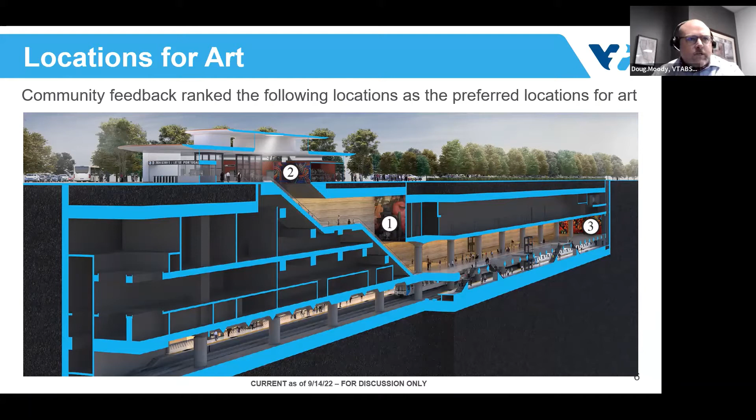This slide includes a summary of things we heard at the last CWG meeting and during the community social about what should be represented in art at the station. We heard there's a multicultural community, and there's multiple heritage that should be considered, including Portuguese. This is the center of the little Portuguese area next to Five Wounds Portuguese National Parish.

There are a lot of Portuguese design elements included in the station, and that should also be included in the elements for art. We should also consider the local Latinx, Mexican population community and those heritages, multicultural as well. Vietnamese came up a number of times, and the Vietnamese community is strong in this area, along with agriculture and transportation.

Some of the ideas I've heard coming up as things that make sense, including from talking with folks at the community social, is that we could use Portuguese azulejo to tell a historic local story. For example, azulejo is often, from what I understand, used to represent histories and heritages. In doing that, you could cover Portuguese, Latin, Mexican, and indigenous heritages, Cesar Chavez and farm workers, the history of orchards, ranches, and farms in the area.

Canneries and fruit packing labels - folks really seem to like the aesthetics of fruit packing labels - and then the evolution of this area and its transportation system. Just to be clear, we're not saying this is what we're doing now, just sharing what we've heard and some ideas that could make sense. We're going to re-explore this and re-engage the design review committees after the contractors are on board.

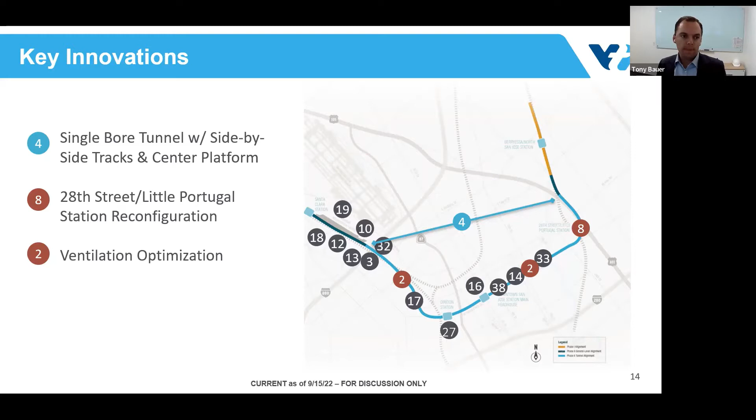This arrangement was only for downtown and Diridon stations, and we wanted to minimize the amount of track where trains were stacked one on top of the other. At each end of the tunnel alignment—the east portal towards downtown San Jose and the west portal towards Diridon—the majority of the tunnel had a side-by-side train configuration, where the trains are on the same level beside each other.

What our contractor determined was that because we are coming into the tunnel where the trains are side by side, and we have to transition to an arrangement where the trains are on top of each other, there's a complicated dance of those trains transitioning from side by side to stacked. The structures needed inside the tunnel to make that transition are very costly, time consuming, and risky to construct. So this was flagged very early in our contractor's procurement process as a potential for innovation.

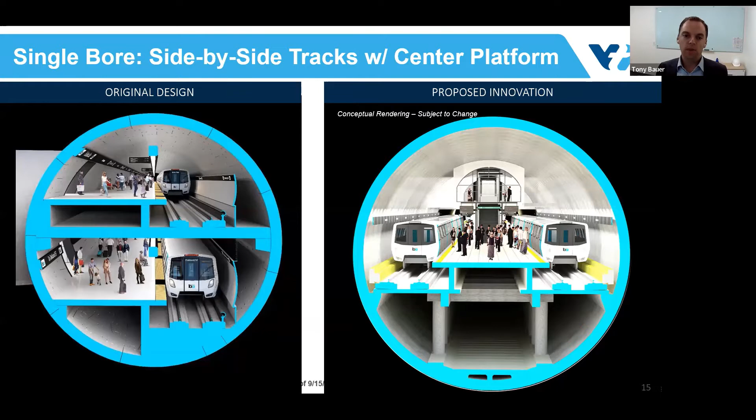If we can go to the next slide, we'll talk through some of the benefits of that.

There's a couple benefits that are obvious right off the bat. There's much improved operational flexibility. This allows us to locate special track work or switches, so a train can go from one side of the track to the other anywhere along the tunnel alignment. That gives BART a lot of operational flexibility. In case of an emergency or maintenance, they'll be able to move trains from one track to the other much more flexibly than in the previous configuration.

In terms of the actual station look and feel, we think the passenger experience is much improved. There's standardized wayfinding, so there's really one path from the street level down to the platform, and it doesn't matter which platform you're going to or which direction - whereas in the previous stacked configuration, you have to decide at the station entrance which platform you're going to. That simplified path of travel improves the passenger experience.

We have a center platform station arrangement, which is very familiar throughout the BART system elsewhere, so passengers are very familiar with this type of station arrangement at the platform level. And again, in case of an emergency, there's a very intuitive emergency egress that everybody is familiar with.

In terms of cost and schedule improvements, there are big improvements here. Even though we are building a slightly larger diameter tunnel, the increased costs associated with that are offset and even exceeded by the simplicity we're bringing to the standardized tunnel cross section. It's going to allow us to build very systematically the structures inside the tunnel for the trainway, platforms, and emergency walkways in a consistent manner, and we don't have those complicated transition zones I talked about earlier, where trains go from side by side to stacked, which is very costly and time consuming to build.

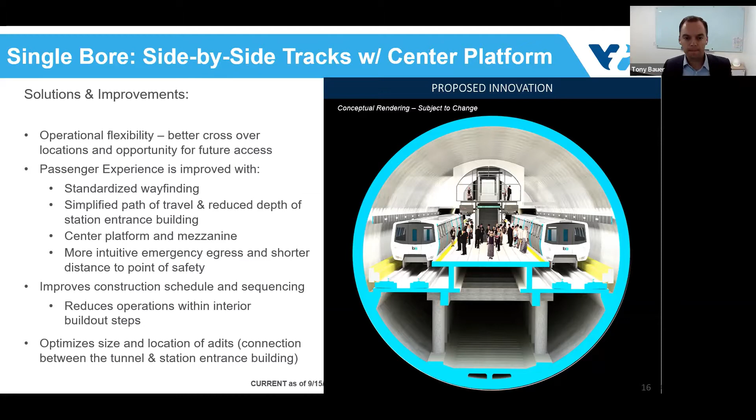We like this concept called the split mezzanine, where we have individual mezzanines for each one of the station entrances. That allows us to create a much larger open space between the two mezzanines, with much larger headroom at this platform area.

Another slight benefit to this arrangement is improved travel time compared to the original design. Even though we're not making the tunnel any closer to the ground surface, the way the platform is arranged within the tunnel actually reduces the passenger's travel distance from street level to platform level, meaning less travel time and distance for everyday passengers.

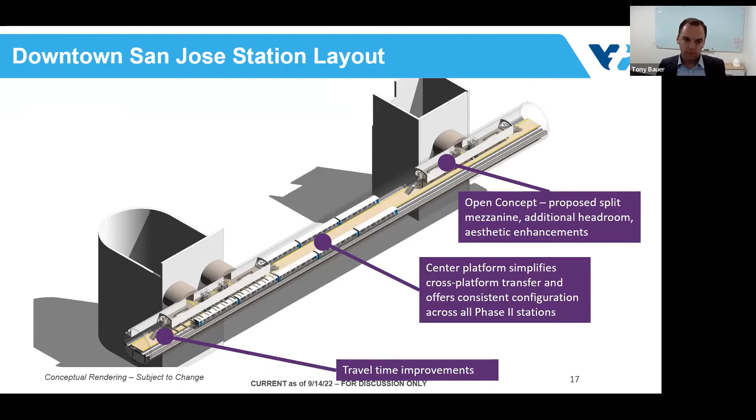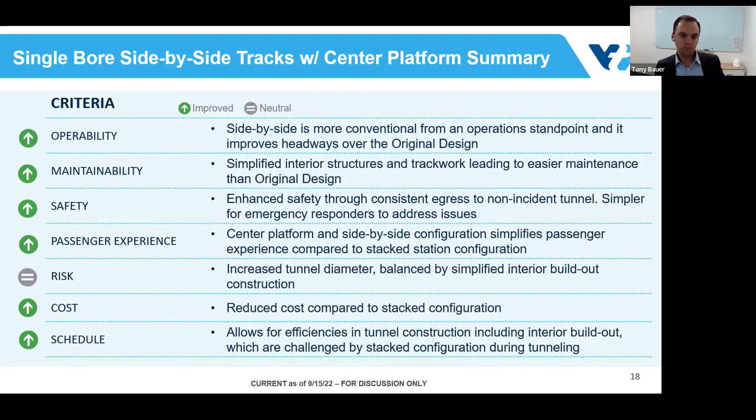The tunnel boring machine, when it gets to this location, would come through one end, be dragged through the station box, and then relaunched the other end to finish the tunneling drive. Because of the length of the platforms for the BART system and the size of this station in general, this is a pretty significant excavation needed to construct 28th Street Little Portugal.

So pretty significant. Now what our contractor has proposed as part of this innovation is, since we're already standardizing the tunnel cross-section from end to end and creating these nice center platform stations at downtown and Diridon, why not envision 28th Street Little Portugal in a similar station configuration as the other underground stations?

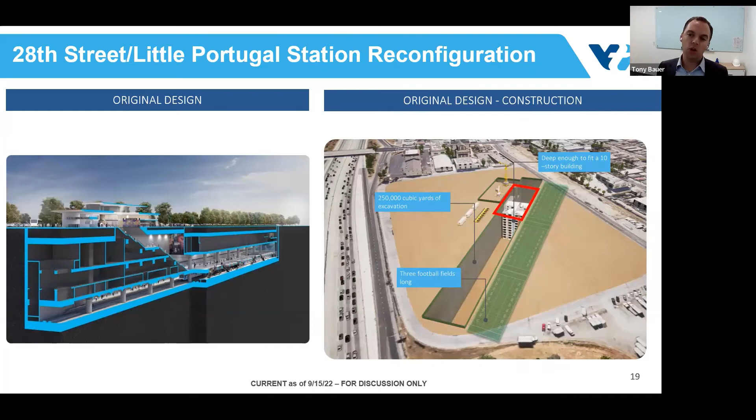That would allow us to greatly reduce the amount of excavation needed at 28th Street Little Portugal to just that area highlighted in the red box. If we go to the next slide, we'll show some options being considered.

As with Diridon and downtown, the majority of the station, all of the platform area, would be built within the bored tunnel. All we would need for excavation from the surface to provide access from street level down to the station would be these much smaller station excavations, or station boxes.

As you can see on the left-hand side, we're studying a rectangular option big enough to fit the escalators, stairs, and elevators needed to go from street level down to the mezzanine level. We're also studying a circular option on the right-hand side, large enough to locate those escalators and elevators needed to get down from street level to the bottom.

It's important to point out that both options are compatible with the station entrance design from the previous original design. The same station entrance aesthetics and configuration we've been discussing for a very long time would be compatible with these two options.

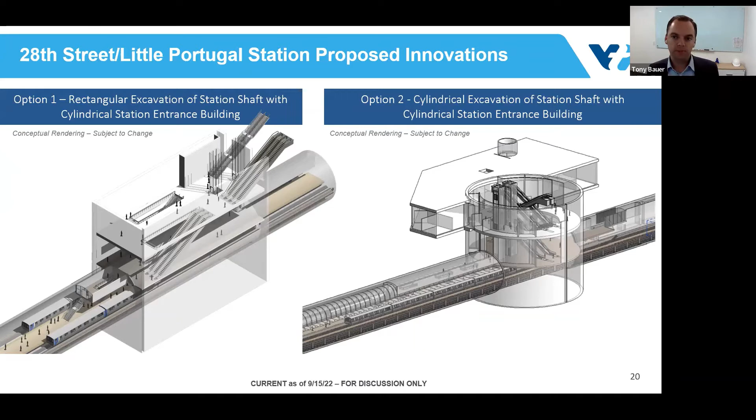Next slide, please. In terms of benefits, we see benefits across the board with this innovation: improved operability, maintainability, safety, and better passenger experience because of the similar station configuration as the rest of the phase 2 system, with simplified wayfinding.

We think it significantly improves the constructability side as well, by reducing risk, improving cost, and improving construction schedule for constructing this station. Next slide, please.

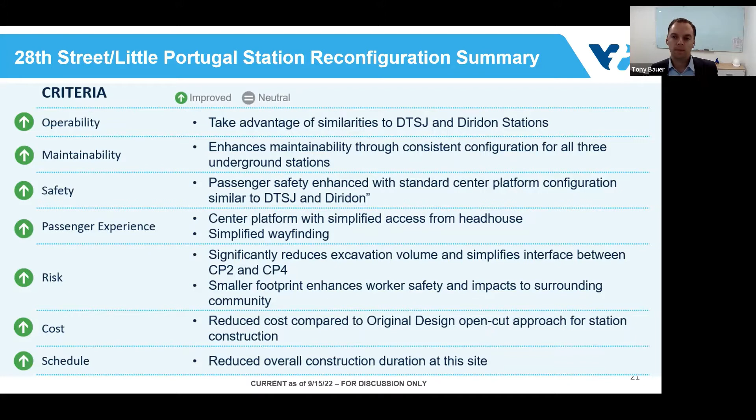Now, as part of the first innovation we talked about, standardizing the tunnel cross-section, you might have seen, and I'll show it in the next slide, that there's space created underneath where the trains are. This is void space below the track, and the contractor has proposed to utilize that space for emergency ventilation.

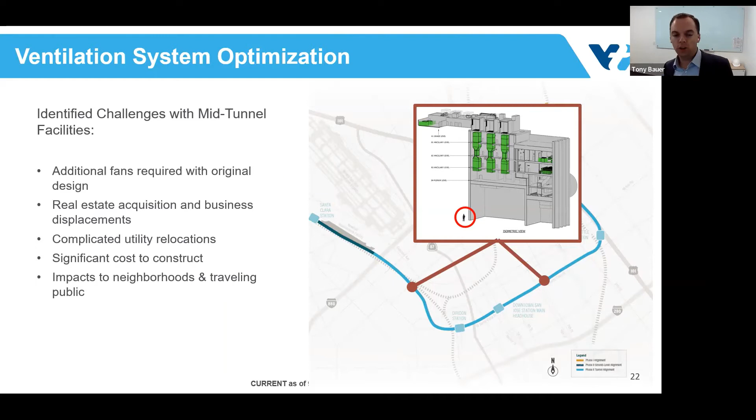That smoke would then be pulled out to the nearest ventilation facility, at one of the stations. At the same time, passengers would evacuate the train through cross passage doors to the opposite trainway and await a rescue train. So really, this emergency ventilation innovation is enabled by the first innovation we talked about, the side-by-side tracks consistent from end to end on the project.

In terms of benefits, we see much improved operability, maintainability, and especially safety. In the event of a fire, this is a very redundant system. In case something goes wrong, there's a lot of redundancy built in, and it gives our first responders, who we've already talked to and who really like this arrangement, a lot of flexibility.

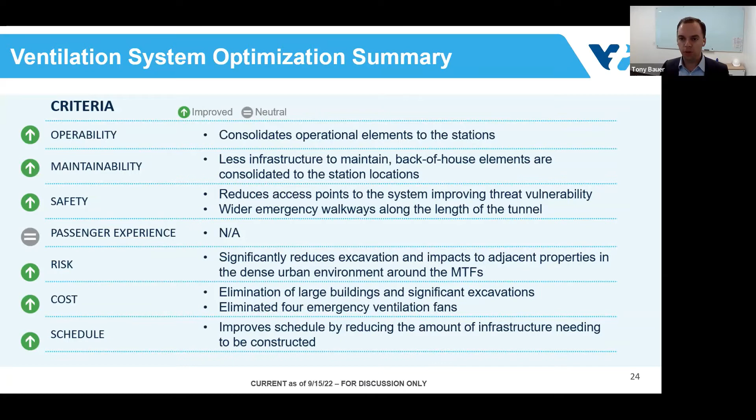We think it improves risk by not having to build these structures at all. It removes another potential access point to the system by not having to maintain or monitor these facilities, and there are obvious cost and schedule benefits from not having to build them at all.

We wanted to talk a little about engagement with the VTA Board of Directors over the next couple of months. We went to the board on May 5th, as discussed earlier, to ask for authorization to award the CP2 contract, which we did in June of this year. The innovations overview is what we provided to the VTA BART board workshop and the VTA Board of Directors over the last couple of weeks.

We also, in order to meet our schedule while still working on the full design of all the work over the next two years, need to accelerate some construction activities to start before the design is fully complete. We're calling these early works packages. One example is ordering the tunnel boring machine.

This is a large piece of equipment our contractor will use to construct the tunnel, and it has a very long lead time, taking between 18 and 24 months to manufacture, deliver to site, and assemble to get ready for tunneling. So we want to start that as early as possible. We also need to start prepping the west portal at Newhall Yard in Santa Clara to receive the tunnel boring machine and be ready to assemble it and start tunneling.

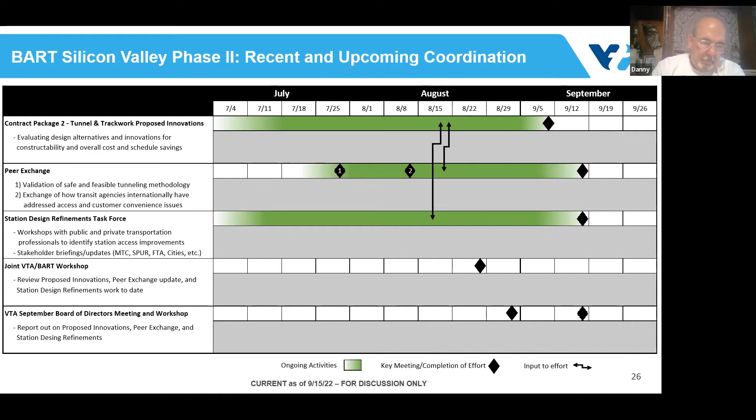Thank you for the comments, Danny. Erica, do you have anything you want to add in response? No, nothing else for now, but thank you for the comments. Cool, thank you. Bill, I see your hand up.

Yeah, I had a couple questions. With this new side-by-side tunnel design, does that mean there can be entrances on both sides of Santa Clara, in particular at downtown and Diridon? This configuration would enable more flexibility in how we locate the station entrances, and the comment that you just made is being considered and studied very hard right now by this Station Design Refinements Task Force. I just think it's very important to have entrances on either side of Santa Clara.

I've got another question or two. On slide number 23, it seemed to show a wall between the tracks.

Could you go to slide 23? Thank you. Yes, that's right.

So you can't go from one train to another, or one direction to another? Let me clarify that this arrangement would only be in the tunnel between the stations, because in the tunnel you want that separation of the two trainways for safety reasons, but that's not required at the station.

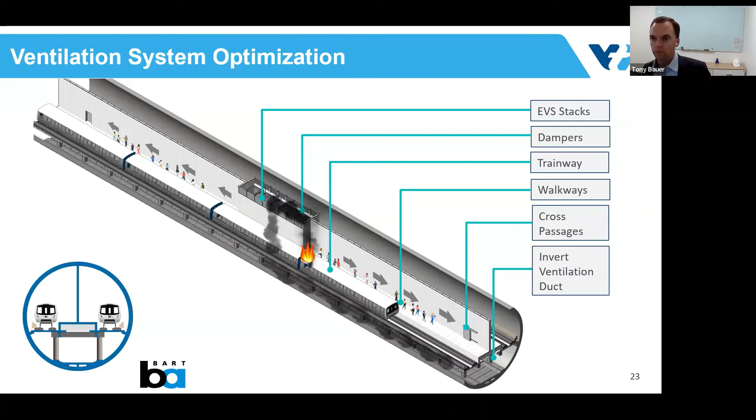Any other questions for Tony or comments on the content he presented before we move on to the station refinement process for downtown and Diridon, where Adriano is going to present, Bill - there'll be a little bit more detail on what you talked about considerations for entrances on both sides of the street for those two stations.

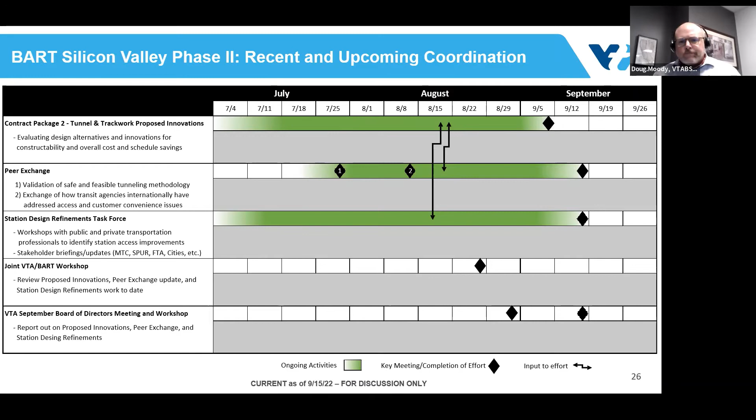Okay, thank you very much, Tony. Adriano, you are up.

Hi, everyone. I'm Adriano, part of the external affairs team for the BART Phase 2 project and the downtown stakeholder coordinator. I'm here to talk about the station design refinement process, which is specific to the downtown and Diridon stations.

Wanted to say first that today's presentation is a very high level presentation focusing on the process. But if you are interested and able, I would encourage you to tune in to our workshop on Friday, the VTA Board of Directors workshop at 9 a.m., where there's about a 45-minute presentation that'll dive into a lot more details. With that said, I'm happy to answer any questions you may have.

Next slide, please. As you may be aware, the Board of Directors did give us a directive to look at opportunities for refining our station designs, specifically trying to improve connectivity for riders at Diridon Station to the future Diridon intermodal station. For the downtown station specifically, the concern was access and safety for pedestrians accessing the stations, so we were asked to look at opportunities for an entrance on the south side, as Bill mentioned.

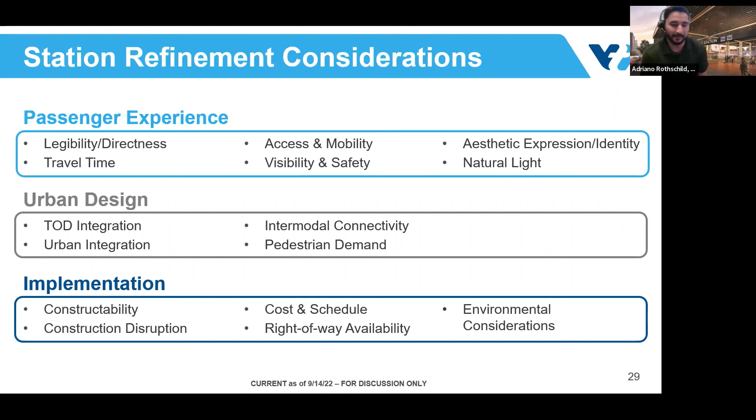As I mentioned earlier, there are some parameters of the approved project. Generally, we are looking to stay within the project footprint. We still need to meet BART facility requirements, which are a big driving factor of what we can do in terms of on-site TOD above the stations, and still would need to meet fire life safety requirements. Ultimately, our stations need to be buildable, operable, and maintainable.

And so we're working very closely with BART in this process. Lastly, we want to make sure that we can provide good value to our future riders and to our citizens. So cost and budget are going to be implications as well.

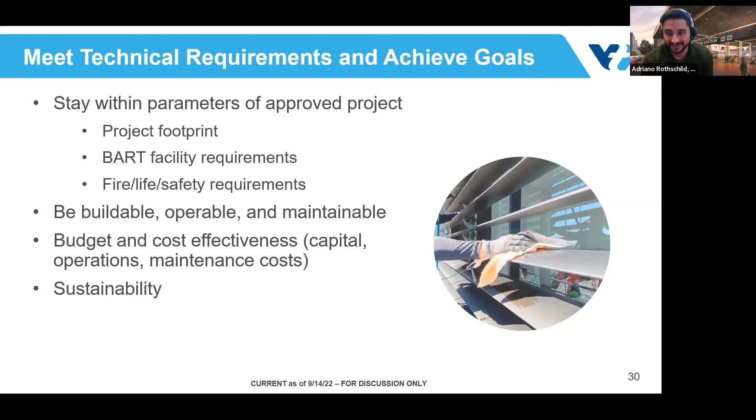Next slide, please. We don't have the exact refinements available to share today, but they are being shared with the board of directors and the public on Friday. Generally, our refinements are falling under two categories.

One is looking at what we can do at the primary entrance building, and that is looking at, can we revise the shape and size of the station shaft and excavation of that shaft, and that it would be a CP2 item. So that is one of those things that we are making sure we can space proof, but we'll need to inform that final design by the contractor.

Generally, the circular shafts that we have at the Diridon and downtown stations provide a lot of structural integrity and benefit, so they reduce cost by eliminating the need for internal bracing, but they do provide some challenges when it comes to TOD integration. We are looking at rectangular shafts that could provide potential expansion of the head house downtown for better vertical circulation by adding length to our escalator runs. So we're looking to reduce the number of escalators needed to get to the platform or concourse level by at least one switchback.

And then also looking at opportunities that we can better accommodate TOD, either by minimizing the footprint of the station shaft and of the BART facilities, or by just being able to accommodate bigger foundations for on-site TOD.